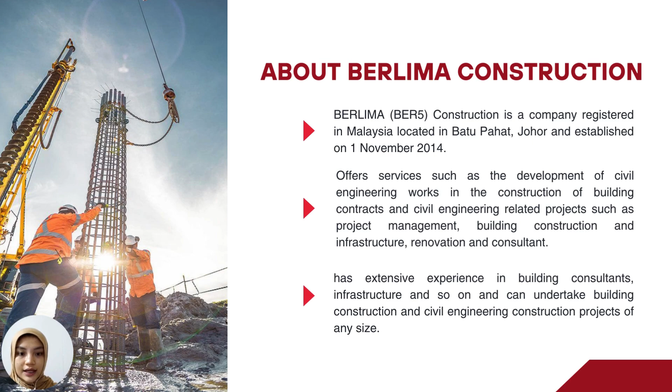Next slide is about Berlima Construction. Our company name is Berlima Construction. It is a company registered in Malaysia and located in Batu Pahat, established on 1 November 2014. It offers services such as development of civil engineering works in building contracts and civil engineering related projects such as project management, building construction, infrastructure renovation and consultant. Our company has extensive experience in building consultant, infrastructure, and so on, and can undertake building construction and civil engineering construction projects of any size.

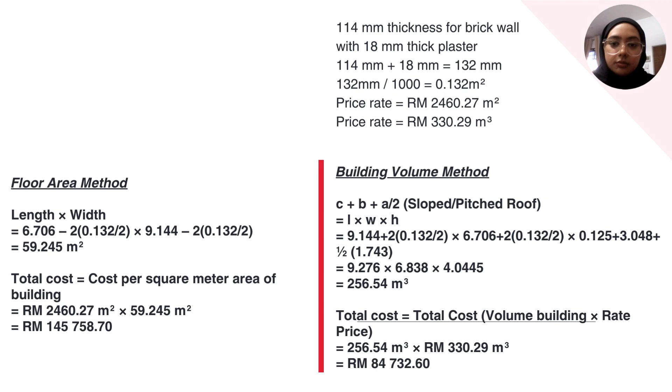For the last part of the presentation, I will explain about project cost estimation, using the technique of preliminary estimating. Firstly, we have the 114 thickness for the brick wall and 18 millimeter thickness plaster. We have to combine the amount, so we get 114 plus 18 equal to 132 millimeter. To make the cost tally with the drawing, we have to divide by 1000, so we get 0.132 meters per square.

So our first price rate is 2460.27 and 330.29. Firstly, we calculate for the floor area method, which the formula is length times width.

So the length is 6.706 minus 2 times the thickness of the brick wall and plaster, which is 0.132 divided by 2. Times by width 9.144 minus 2 times 0.132 divided by 2, equals 59.245 meter per square. So the total cost for floor area method is the price rate.

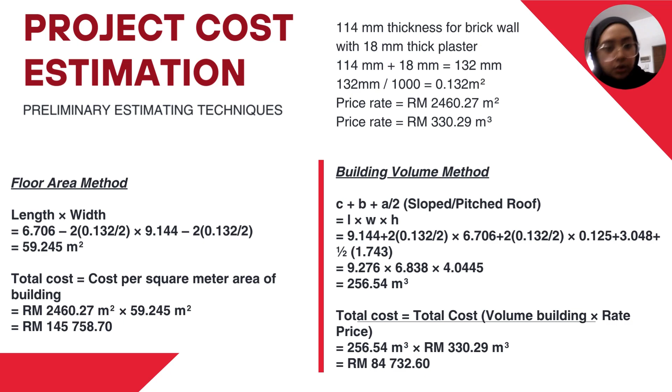84,732.60. Thank you.

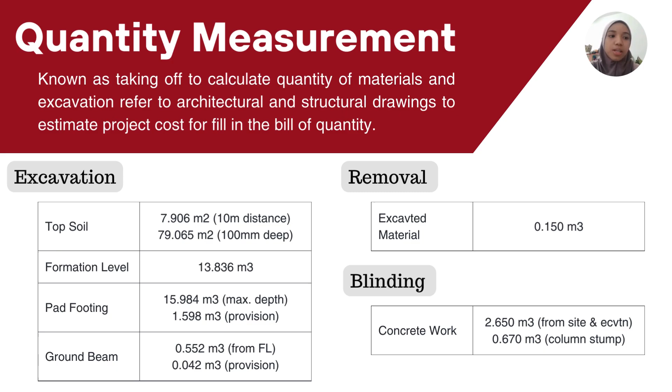Next we move to removal. Removal for excavated material, which is 0.150 meter cube, and blinding concrete work is 2.650 meter cube from the site and excavation, and also 0.670 meter cube for the column stump.

Next is formwork. Formwork, which we have 3 materials, which is foundation and beds, we got 57.6 meter, and ground beam 35.380 meter, column stump...

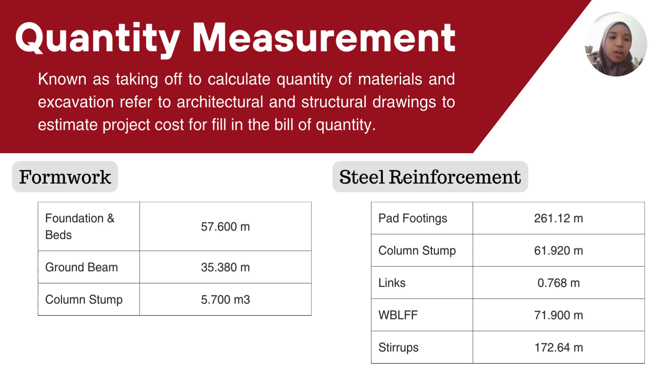5.7 meter cube. For the steel reinforcement, we need to find the pad footing, column stump, links, work below lower floor finishing, and stirrups. Pad footing we got 261.12 meter, column stump we got 61.920 meter, links we got 0.768 meter, work below lower floor finishes (WBLFF) we got 71.9 meter, and stirrups we got 172.64 meter.

And lastly, for the hardcore and DPM. Hardcore and DPM we have three materials, which is WBLFF, internal floor finishes, and roofing finishes. WBLFF we got 56.650 meter square. Internal floor finishes we got 987.33 meter square. And lastly, for the roofing finishes we got 323 meter square.

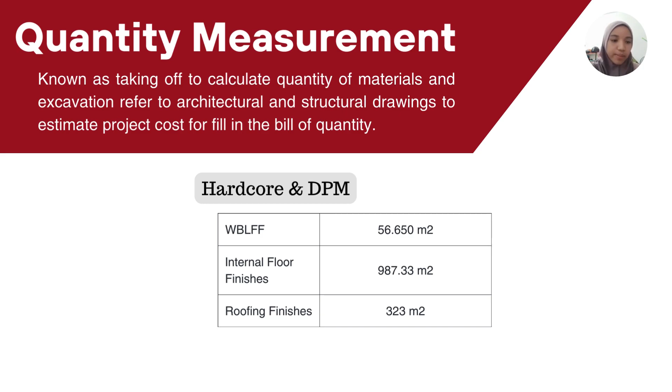Okay, next is bill of quantity. Bill of quantity is a list of project specific measured quantity, which our total cost is 16,865 ringgit and 83 cent.

For the first description is excavation. Excavation for topsoil we got 115 ringgit 19 cent, and for the formation level we got 124 ringgit and 52 cent, and for the pad footing for the maximum depth we got 147 ringgit 5 cent, and provision we got 125 ringgit 84 cent, and for the ground beam from the formation level we got 5 ringgit and 7 cent, and provision we got 3 ringgit 31 cent.

Okay, next for the blinding and concrete. For excavation from site we got 477 ringgit 27 cent, and in the column stump we got 120 ringgit 67 cent.

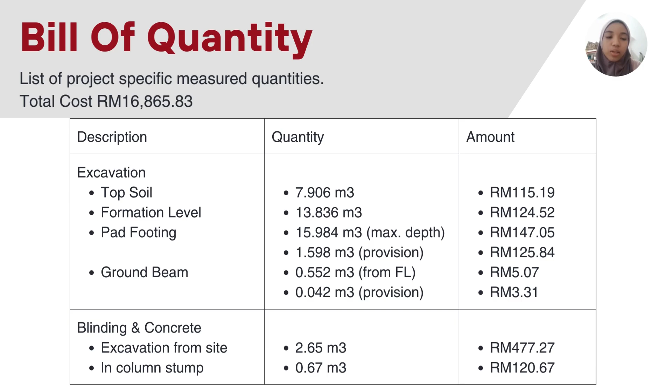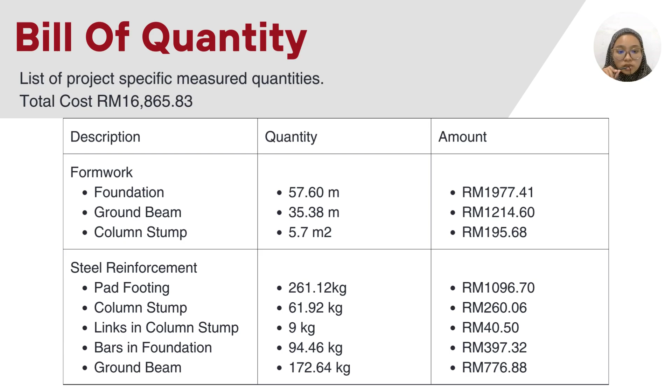Next is the reinforcement. So for the reinforcement, we have to find the quantity for pad footing, column stump, link in column stump, bar in foundation, and ground beam. For pad footing, the quantity is 261.12 kilogram, and the amount is 1,096 ringgit 70 cent. For the column stump, the quantity is 61.92 kilogram, so the amount is 260 ringgit 6 cent. And then the links in column stump is the quantity is 9 kilogram, so the amount is 40 ringgit 50 cent. And for the bar in foundation, the quantity is 94.46 kilogram, so the amount is 397 ringgit 32 cent. And the last is ground beam, the quantity is 172.64 kilograms, so the amount is 776 ringgit 88 cent.

Next is removal for excavated material. The quantity is 0.15 meter cubic, and the amount is 3 ringgit 77 cent. And for hardcore and DPM, the quantity is 56.65 meter square, and the amount is 266 ringgit 26 cent. And then for internal floor finishes, the quantity is 987 pieces, and the amount is 6,909 ringgit. And for roofing finishes, the quantity is 323 pieces, and the amount is 1,615 ringgit.

So we have to total all of the amount, and we get the total cost is 16,865 ringgit and 83 cent.

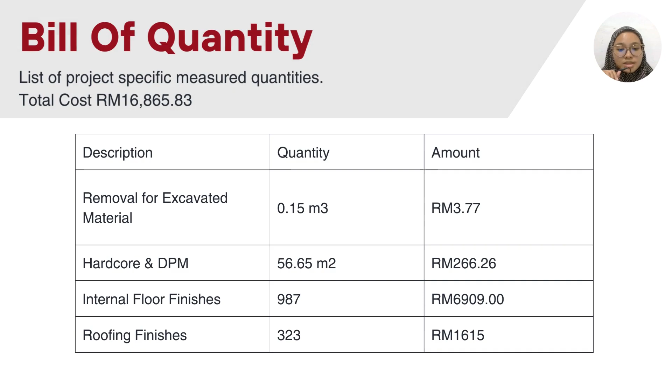Assalamualaikum. My name is Nur Izzati binti Ismaruddin. My matric number is CF2202175. I'm the site leader in this project. So today I want to present about build up rate.

In this project, there are two types of build up rate that we need to calculate. First is build up rate for soil excavation. The other one is build up rate for concrete.

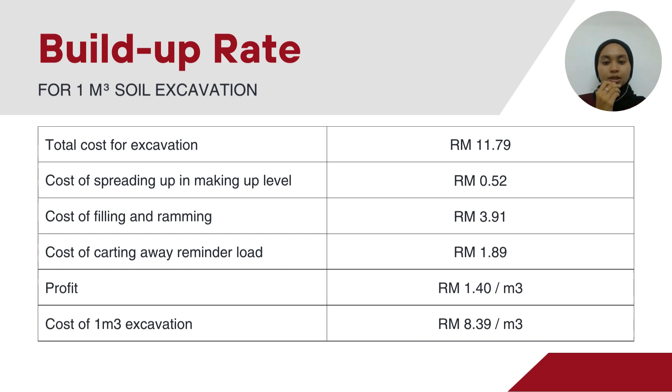For build up rate 1 meter cube soil excavation, first we need to calculate total depth, excavation and volume of excavation to get the total cost of excavation, which is RM11.79. After that, cost for spreading and making level, we got 52 cent. Cost for filling and ramming was 3 ringgit 91 cent. Cost of carting away remainder load was 1 ringgit 89 cent. Then we need to calculate the 20% profit, so we got 1 ringgit 40 cent per meter cubic. So cost of 1 meter cubic excavation is 8 ringgit 39 cent.

Then for build up rate of 1 meter cubic selected concrete grade using concrete mixer, we need to calculate the material cost, labor cost, equipment cost, and total cost. In material cost, we need to get the total cost of material for 4 meter cubic with 50% wastage, so we got 274 ringgit. Then total for labor cost was 37 ringgit 50 cents, which is 3 hours for concrete mixing multiplied with worker salary per 4 hours. After that, total for equipment cost was 13 ringgit per meter cubic. Thus, the total cost of concrete for 1 meter cube with 20% profit was 385 ringgit 50 cent.

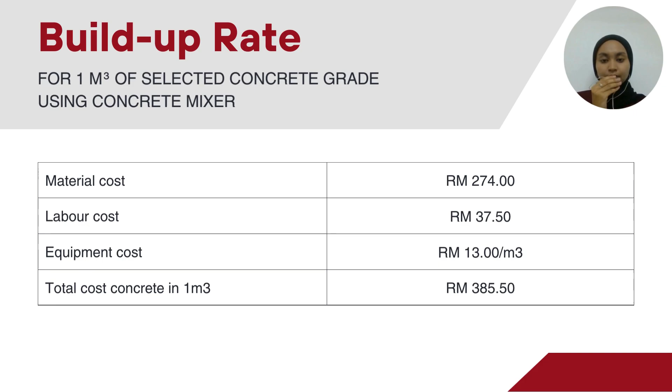Next is performance bond and LAD. In construction, performance bond, known as a contract bond, is a guarantee of the completion of the contract according to its term of scope and time. So the formula for performance bond is contract sum multiplied by 5%. The contract sum we get from total of bill of quantity, then we get 16,865 ringgit 83 cent multiplied by 5%, and then we get 843 ringgit and 29 cent.